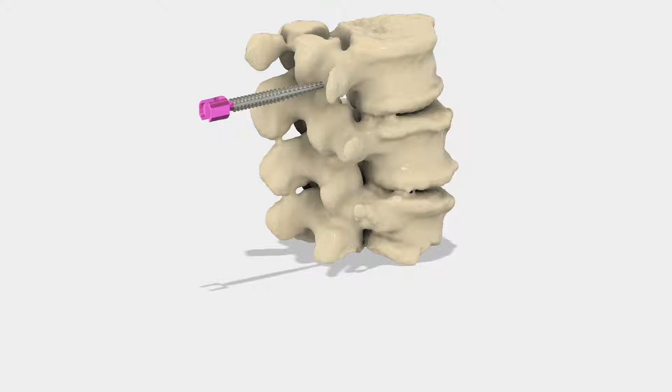This is the first tutorial in a series called CAD for Physicians, in which I'll teach computer-aided design with Fusion 360 using examples and projects that would be of interest to physicians. Each new lesson will build on a previous one.

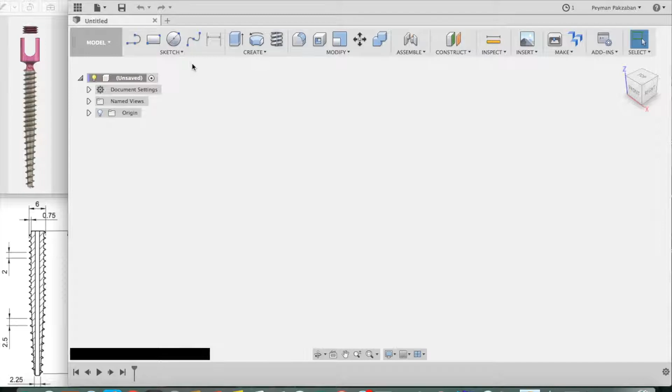So let's get started. As always, we start with a sketch. Grab the line tool, select a coronal plane, start on the origin, draw a vertical line to 50 millimeters. Continue it to the right for about 6 millimeters. It doesn't have to be exact. Then draw another vertical line. Make sure it's vertical, halfway down.

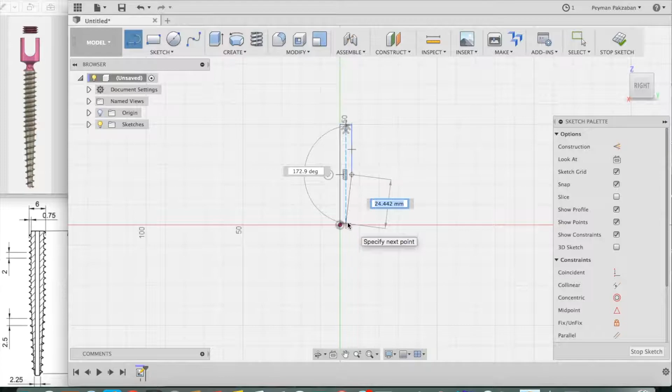It doesn't have to be exact. Then draw an angled line all the way to your x-axis. Make sure it's on the line. The angle doesn't have to be exact. And finally, connect to your origin. Press escape. Make sure that your bottom line is actually horizontal.

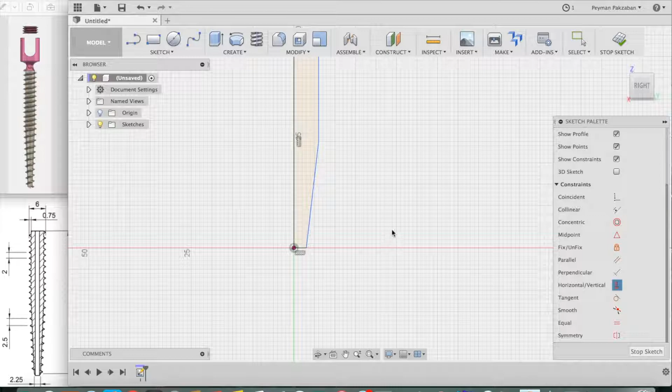You can go to your constraints and grab a horizontal constraint, which is found here, and click on that line. It'll make it horizontal. Stop sketch.

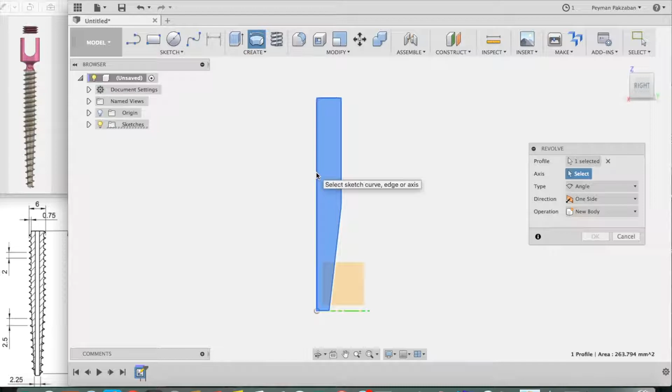Let's revolve this profile. Go to your revolve command. The profile to be selected is this one. The axis is this line right over here. Press OK. And this is the general design of the core of our screw.

Now, of course, we want to assign specific values for the sizes and apply threads to the screw. And we're going to do this parametrically. Let's explain what that means.

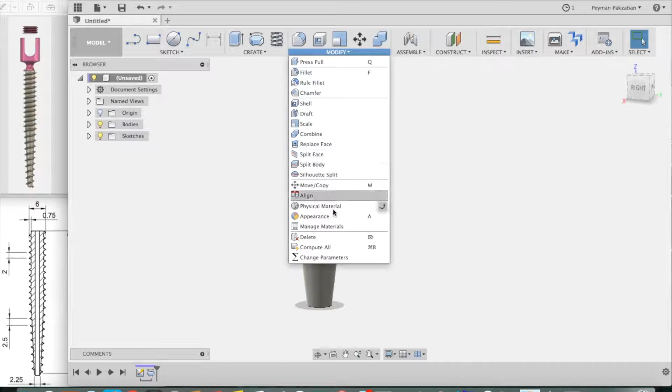Go to the Modify menu, grab Change Parameters item, and open this screen. Let's define some parameters. Press on the plus sign.

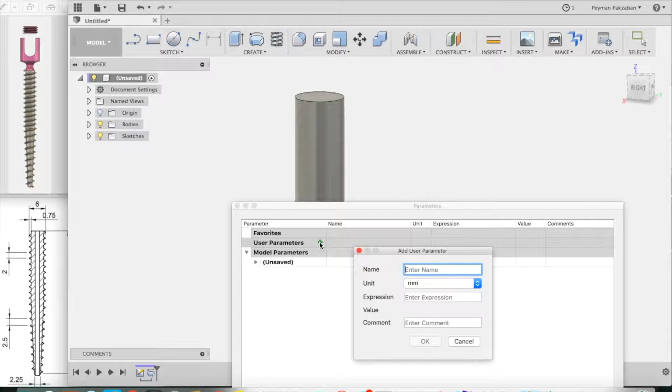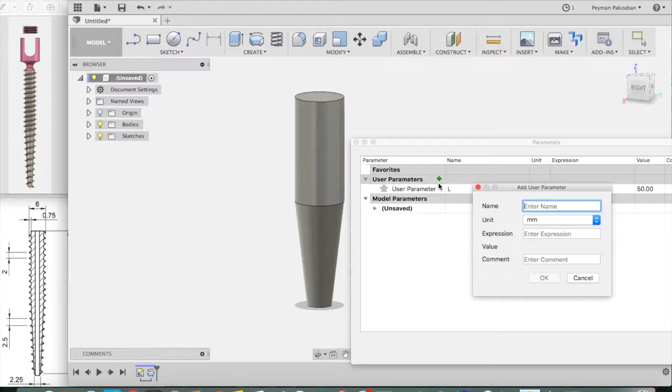The first parameter will be the length of our screw, so we call it capital L, and as an initial value, we'll put in 50 millimeters. Press OK. The second parameter, press on the plus sign, will be the diameter of our screw, the outer diameter, OD, and as an initial value we'll put 6 millimeters.

Press OK. The third value will be the depth of the thread, which is from the surface of the core to the tip of the thread, and that's 0.75 millimeters. So we'll say plus TD for thread depth, and the initial value is 0.75.

The fourth parameter will be our thread pitch, and that's the distance between the crests of the thread. Notice that we have two different pitches. In the upper part of the screw we have 2 millimeters, in the lower part we have 2.5. So say plus pitch upper, PU, will be 2 millimeters, plus again pitch lower will be 2.5 millimeters.

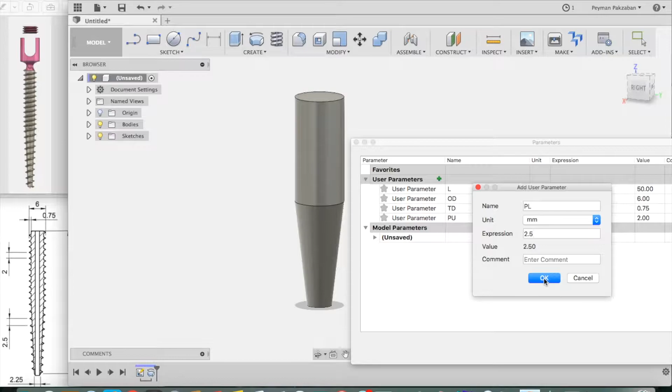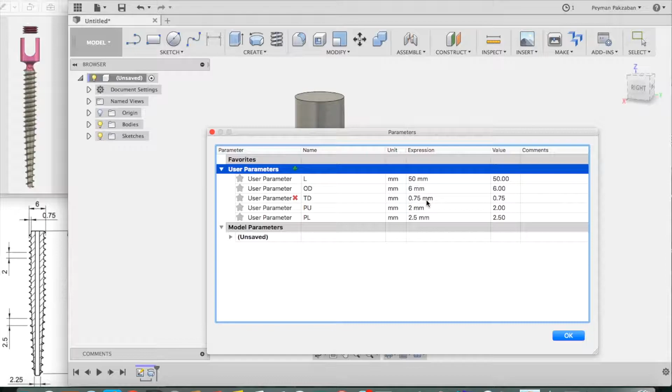And the purpose of this design and the different pitch is to increase the pull-out strength of this pedicle screw from the bone. So now we have defined all of our parameters. Everything else in this design will be based on these parameters, so that later on, if we want to make a screw of a different size, different length, different diameter, different pitch, we can just come in and change these numbers and it will automatically produce a different screw for us.

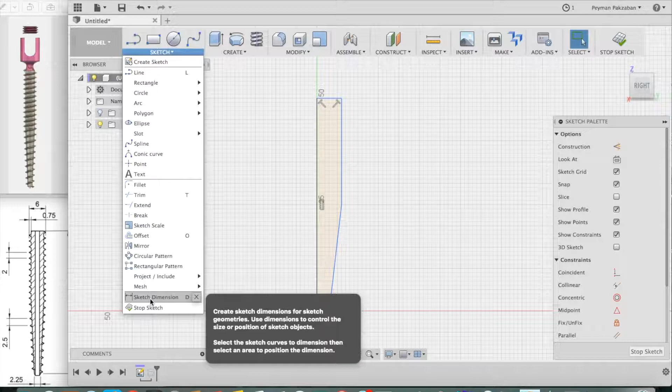Press OK. Now let's go back to our sketch, go to the timeline and double click on the sketch. Let's go over each of these lines and redefine them in terms of our parameters. To do that, go to the sketch menu and grab the dimension tool, sketch dimension. You can also use the keyboard shortcut D and click on this length, pull it out, click again.

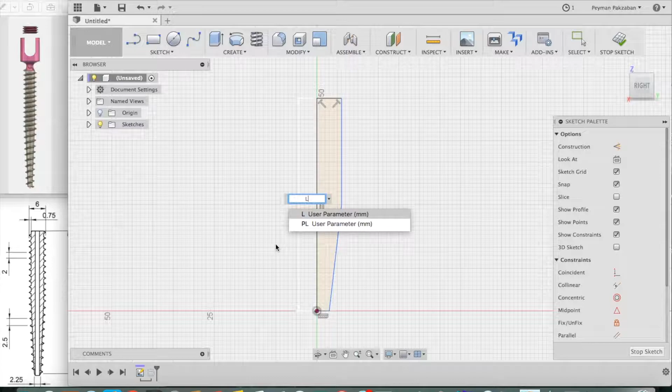It says 50 millimeters. We want it to be a parameter, and we have defined capital L as the length of our screw. Press return, return again. So now that's defined as a function.

Let's do the same thing with this length. Click on it, pull it up, click again, and this is the core radius. The core radius is related to our user-defined outer diameter by this formula: OD, which is outer diameter, divided by 2. That gives us the outer radius. That includes the thread depth, so we will subtract TD from that.

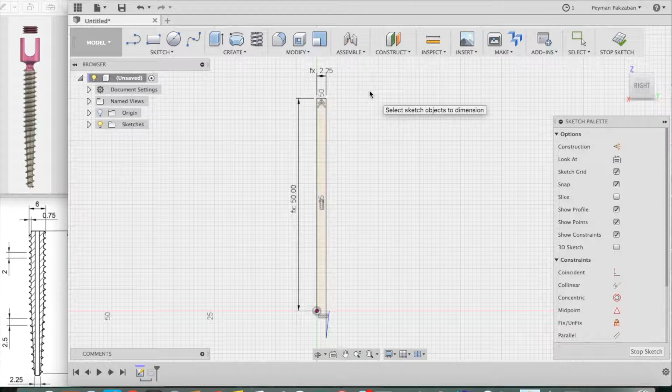Press return, return. Next, we will define the length of the upper core, which is basically half of the length of our thread. So click on this line, draw it out, click again, and we will make that capital L divided by 2. Return.

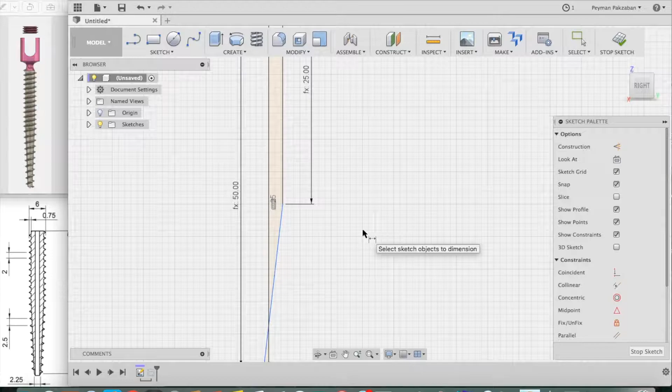And before we go to the next step, let's reposition this line. Press escape, zoom in, find this point, and drag it over to the other side.

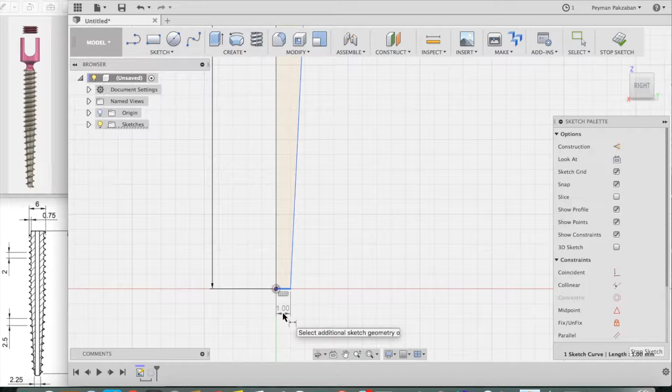Press the keyboard D to get the dimension tool. We're going to define this length, our lower core radius, which is half of our upper radius. Click on here, then click on this dimension. It'll enter that dimension as a parameter, and we'll divide that by 2. Press return, return.

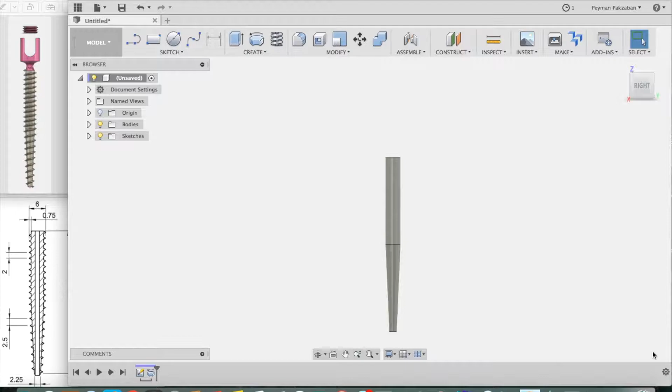Stop sketch. Now if we go back to the Sigma menu, we will see that it has defined a whole bunch of new parameters based on our user parameters.

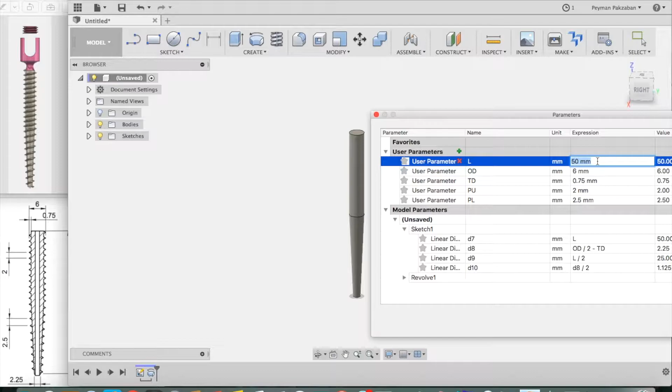And if I were to change my driving parameters to different numbers, let's say a length of 80, it will automatically change my shape.

Now let's go over these newly defined parameters and make sure we understand them. D7 was simply the length of our screw, and that's equal to L. D8 was the core radius without the thread, so let's just put that down, core radius. It was our larger of the two core radii.

L divided by 2 is the length of each of the cores. This is a dual core design, so core length for each segment. And D10 was our core radius at the tip. We call it smaller.

Very good. So I'm going to screenshot this and keep it around so I can refer to it in the next steps.

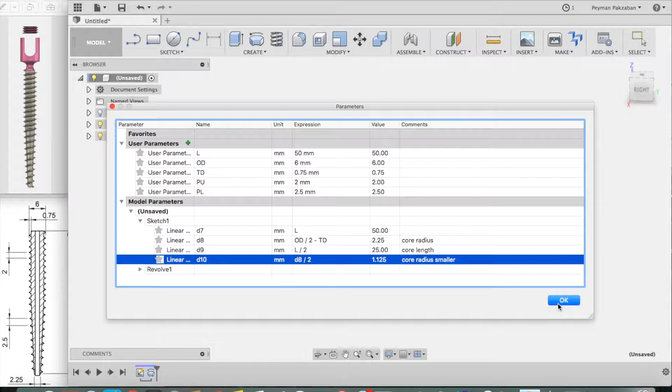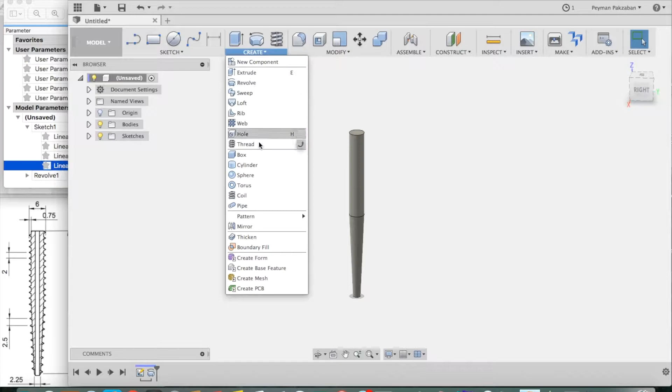So now we're ready to apply some threads to our core. Fusion has a command for threads, but those threads are only applied to cylindrical surfaces and cannot be applied to conical surfaces. Furthermore, because they are industry standard threads, you have very little control over the thread profile and the pitch, etc. So we're going to use the coil command to form our threads.

Press on the horizontal plane, place the center of the coil on the origin, draw an arbitrary circle out, and then extend the coil up a little bit.

Now we're going to look at all these parameters. The type, we're going to control the height and the pitch of our thread, so select that. The diameter we will skip for now.

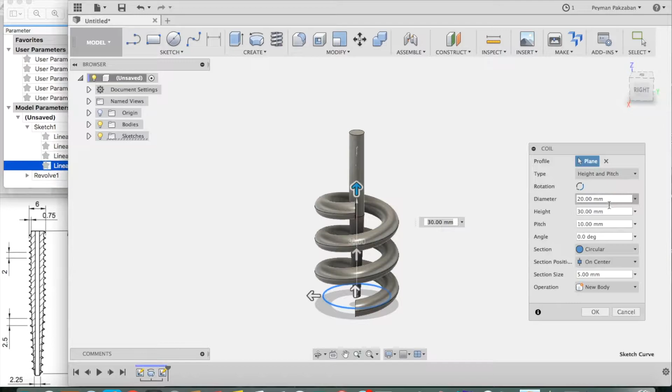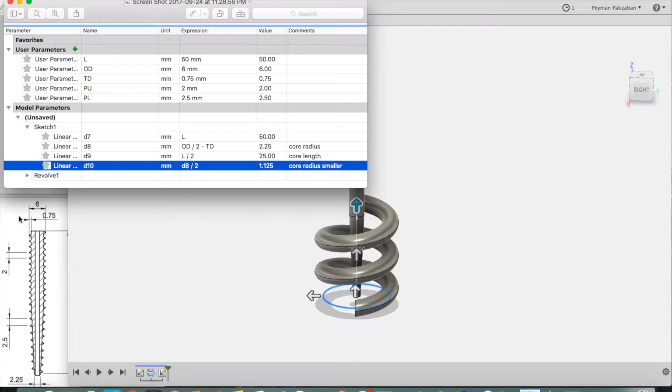The height of our thread will be basically half of the length of our screw, so it's L divided by 2. Also the same as D9. So I'm going to put D9 in there. Same thing. The pitch in this part of the screw is 2.5.

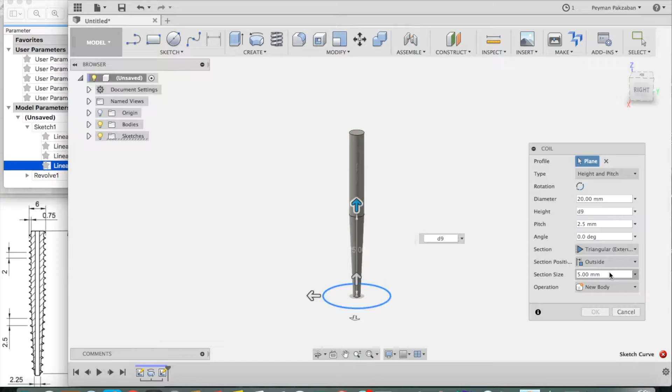The angle we'll skip for now. The section will be triangular, external, and it'll be applied to the outside surface. And the section size is really the same as thread depth. It'll be 0.75. Go back to the diameter.

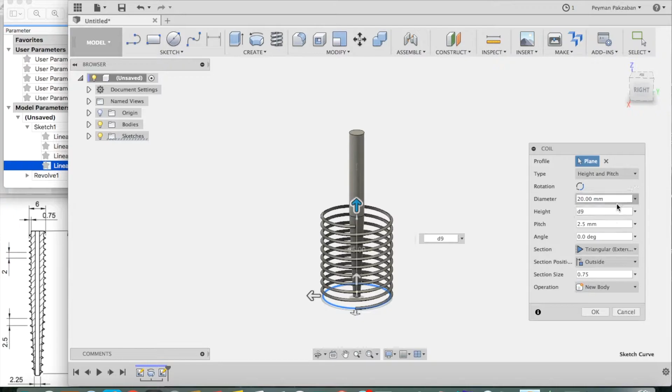They're asking about this lower core diameter. Well, let's look over here. Our smaller core radius was D10, so the smaller core diameter will be D10 times 2.

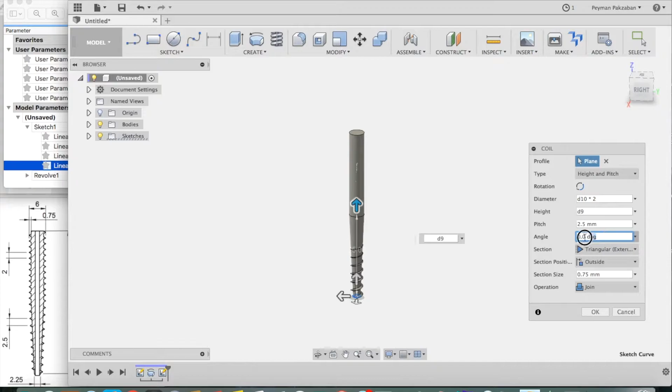Alright, we're going to make sure that this is not cutting but actually joining our thread. The last thing we have to do is specify a thread angle. Let's just put in a random angle of 10 and see what happens. You can see that this angle is too wide and it's not applying the thread to the surface of our core.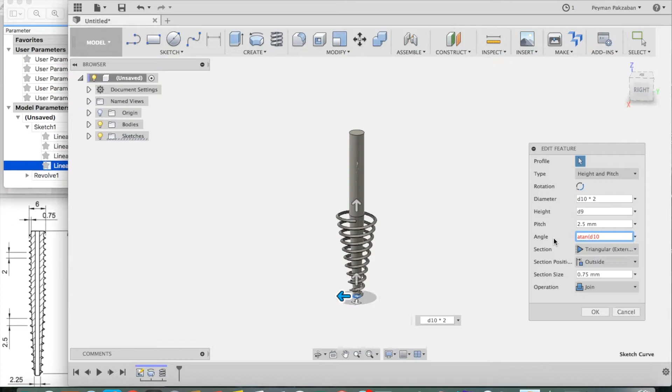The appropriate angle is actually the arc tangent of D10 over D9, and I ask you to prove that to yourself. And now you see we have a perfect thread applied to the core of our screw. And we have the join operation.

Press OK. Now we're going to do the same thing with the upper part. It'll be a lot easier because we don't have any angle to deal with. The only thing is that we have to start it at this point over here.

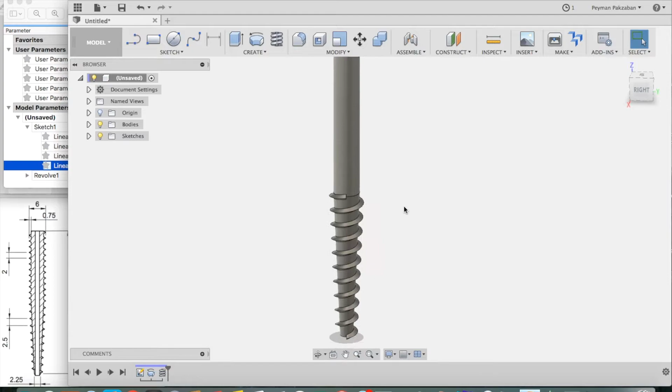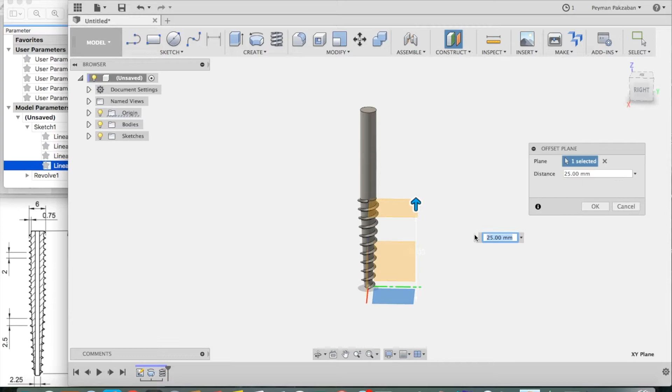So first we need to define a new plane, an offset plane. We select, let's reveal our origin. We select the horizontal plane and pull it up. It has to be pulled up to the length of exactly half of our screw. So we can specify that distance parametrically. It is L divided by 2 and press OK.

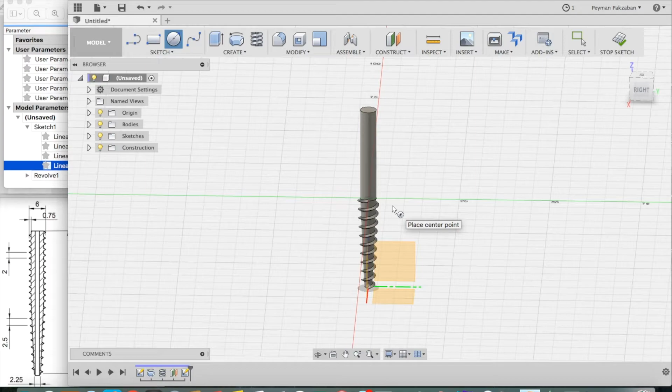Now we can build our coil. Grab the coil command. We'll press on this plane. Go to the top view. Place the center of the coil on the origin. Go out a random distance.

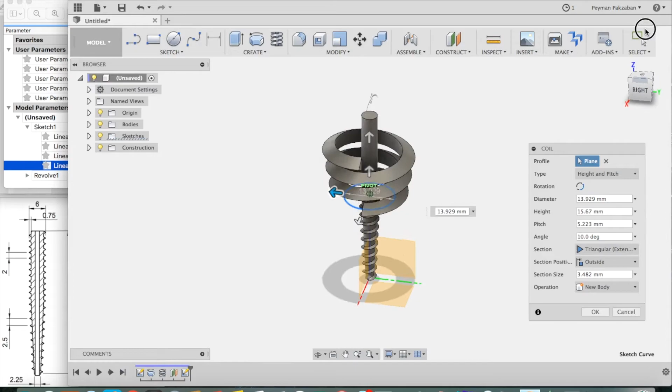Again, the height and pitch are being controlled. Here the diameter is our upper core diameter, which is twice the core radius. So it's D8 times 2.

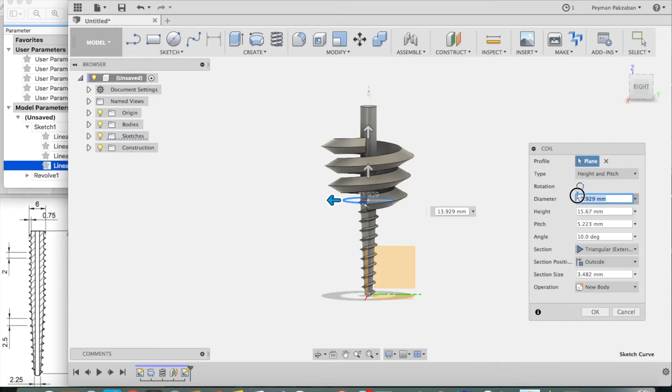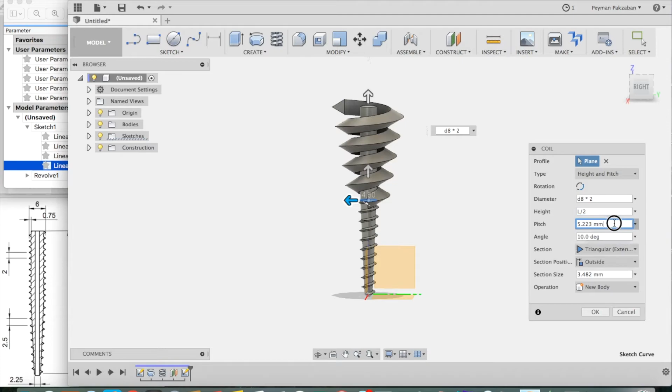And our height is L divided by 2. Our pitch in this upper part is 2 millimeters. Our angle is 0 degrees. Our thread is triangular, it's on the outside, and the section size is 0.75.

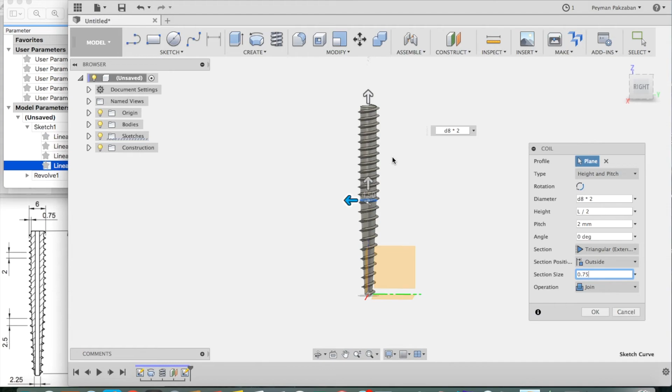And it is joining our previous body. We have a perfect thread now.

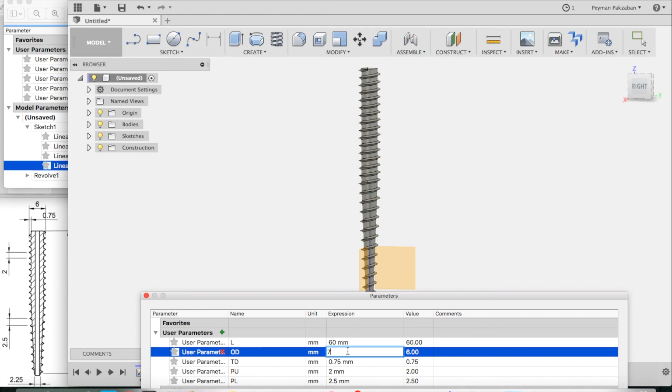Press OK. If we go back up to the Sigma menu, change parameters, we can simply change our length to, let's say, 60, or our diameter to, let's say, 7. And we can create all kinds of screws of different length and diameter while maintaining our pitch profile constant.

In the next lesson, we'll learn how to create a screw head.